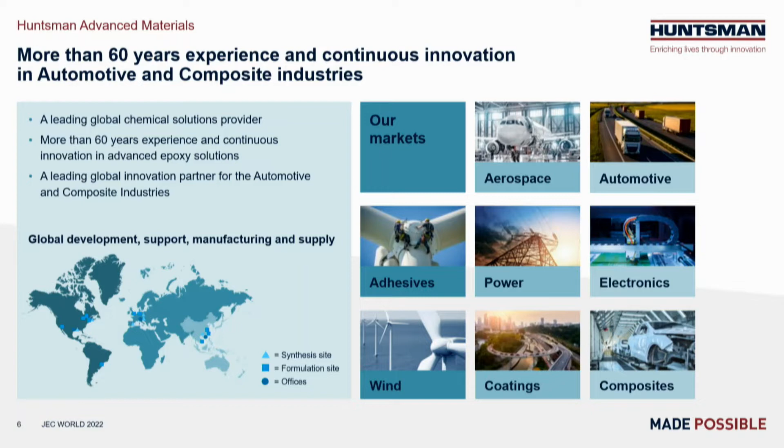We are specialized in epoxy resin formulations, and we serve different markets. We have a global footprint in terms of research centers, manufacturing sites, development offices, and so on. We serve several markets like aerospace, automotive, adhesives, power, wind energy, coating, and of course composites, industrial composites linked to transportation.

Building a sustainable future. I will try here, because we see so many greenwashing presentations these days, to focus on facts, and bring key actions, even short-term ones, even though we have longer-term responsibilities and longer-term actions.

We do take our responsibilities these days, because as a chemical player in the industry it's really important. It's not a nice to have, it's a must to act and to do something. And it's not just for the long term, it's acting today, for tomorrow, and even for longer term.

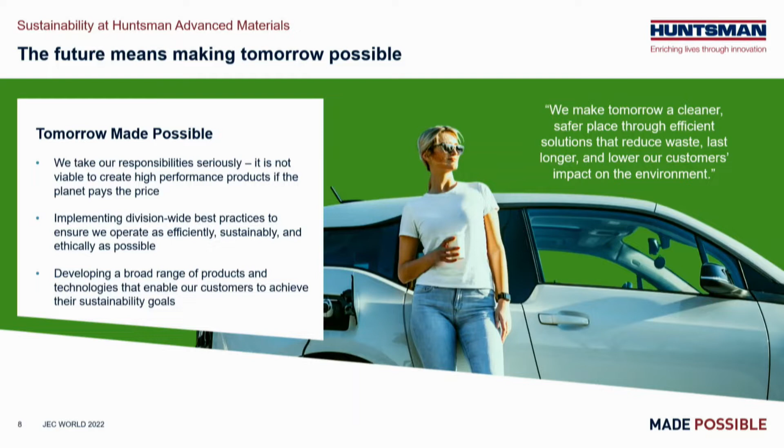So we discuss with our customers, we check the regulations, we check whatever is possible to do to put some concrete actions in place. We act basically on 4 different elements.

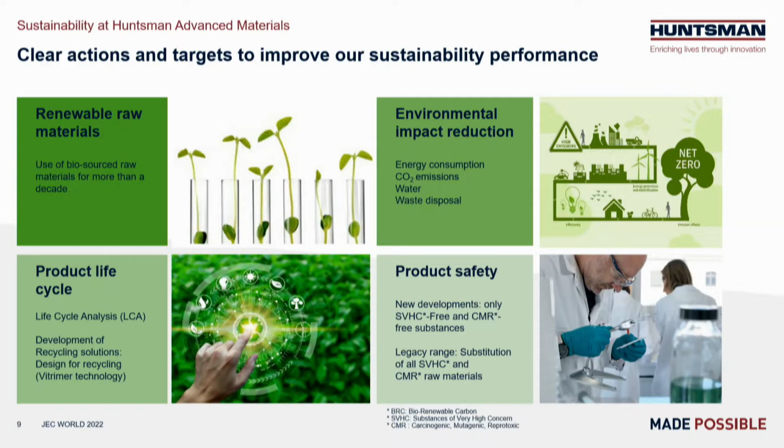The first element is the use of renewable raw material in our products, in our epoxy systems, in our epoxy resins. Actually, we've been using bio-renewable resources for more than 10 years now, so almost for a decade. We weren't really communicating on this before, but it was already part of our DNA and part of our products. And of course, to quantify and analyze this, we look at the product life cycle. The life cycle assessment helps us quantify how much and where we should take action.

We are also involved in the recycling topic, which is of course very important, especially when talking about thermosetting resins. We have actions in place, we are involved in developments, and we are involved in initiatives with universities and so on, and European-funded projects regarding, for example, the Vitrimer technology.

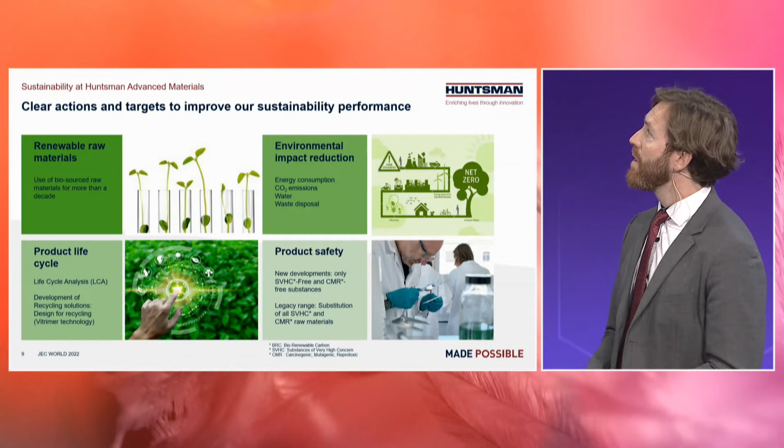Another aspect is the reduction of our environmental impact: the energy consumption, the CO2 emissions, the water consumption, and waste disposal.

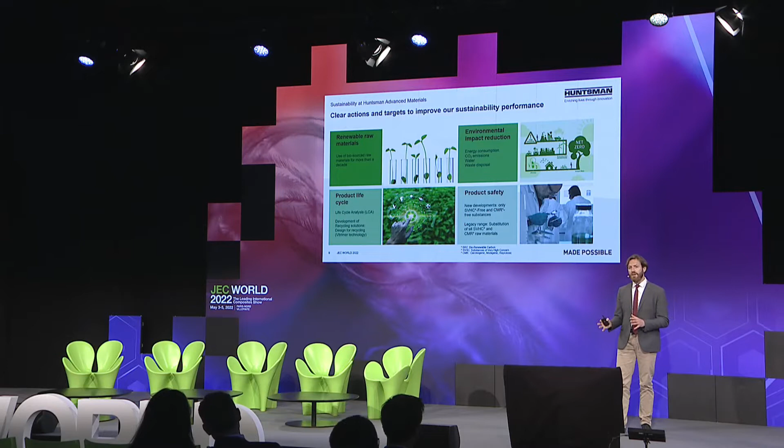And finally, product safety. We have a dedicated team of people taking care of new developments, but also the legacy range, checking in order to not use any substance of very high concern or carcinogenic, mutagenic, and reprotoxic substances.

So you can say, yeah, nice, you have a nice pitch here, but what are you actually doing? On the next slide, the idea is to bring you some numbers on two of those elements.

The use of biorenewable products or substances has been done for a decade, as I mentioned before. Today we have between 15% and 85% of what we call the biorenewable carbon content in our resins, epoxy resins, and reactive diluents. We have a roadmap, and next year we will have 100% certified biorenewable carbon in our resins. That's the first step, and the second step will be to tackle the point of our curing agents, so epoxy hardeners, with a roadmap before 2025.

Then in terms of reduction, we quantify it by analyzing the global warming potential of our epoxy resins. We started this exercise in 2020, where we started with, for example, 5.4 kilograms of CO2 emissions per kilogram of epoxy resin created.

And then in 2021, thanks to the management of the energy source we are using, we already achieved a reduction of 23%, and now we are on the way to decrease it by 70% between 2023 and 2024. So substantial improvements.

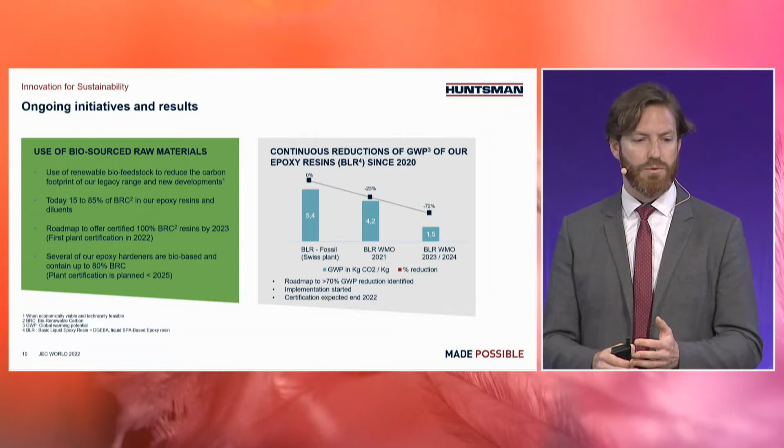These are more short-term elements, but I think it's important to highlight the actions we already have ongoing today. So with this introduced, let's go for the solutions and explain what we are doing for tomorrow's mobility.

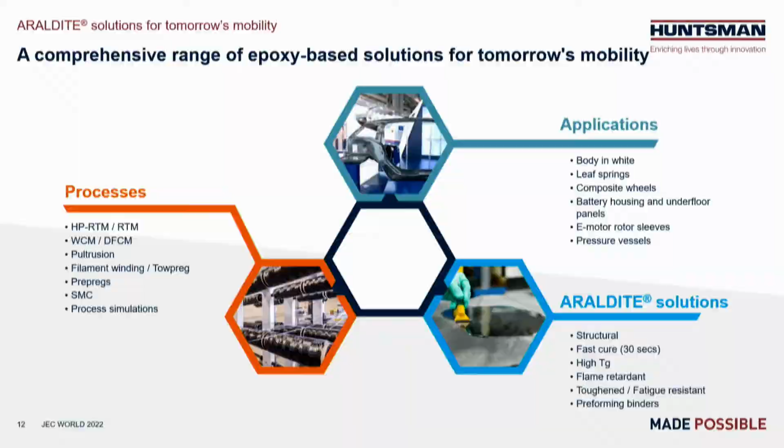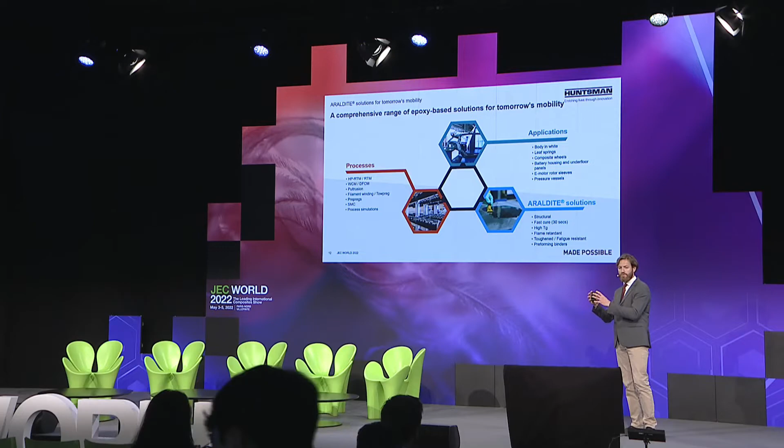On this slide, I propose an overview of the epoxy range, included in the big picture of applications, products, and processes. I believe everything is really interconnected. You take an application, then you have specific requirements, so you put a dedicated epoxy resin solution in front of it, and then you need to process it in the right way. Even when you start from the application, you design a process. So it's important to understand the big picture to bring our customers the right product and solutions.

In terms of applications, we target structural parts like body in white. It can be for automotive transportation, but nowadays flying vehicles are also using our mass production systems, actually in development right now. We can also replace leaf springs. We have composite wheels. The more emerging applications are related to battery housings, protection of battery cells, protection of passengers in vehicles, and underfloor panels. There's also an interesting application related to electric motors, covering rotor sleeves, so composite rotor sleeves. And finally, pressure vessels, and with the emergence of hydrogen and fuel cell vehicles, pressure vessels are something important we are focusing on today.

In front of this, we put the ARALDITE solutions, epoxy-based formulations, which are structural and can cure in seconds. We have one system curing in 30 seconds at 140 Celsius, without any post-cure afterward. We can also address high thermal resistance, with systems having TGs above 200 Celsius. We have flame retardant systems that can be injected in different processes without containing any fillers or solids inside. We have toughened resin systems designed for fatigue resistance, and preforming binders for mass production.

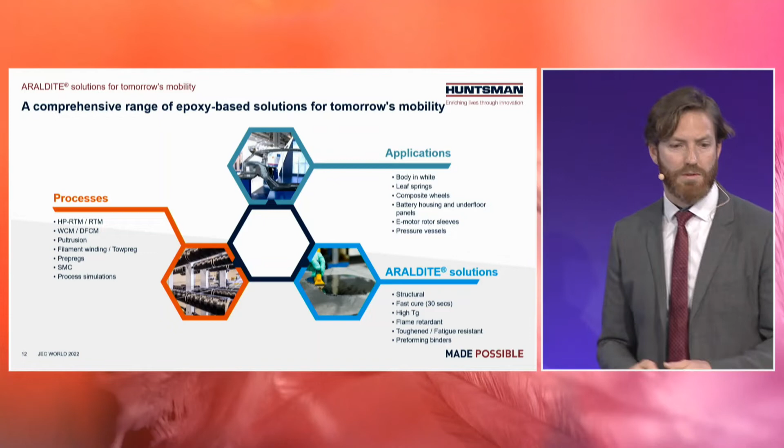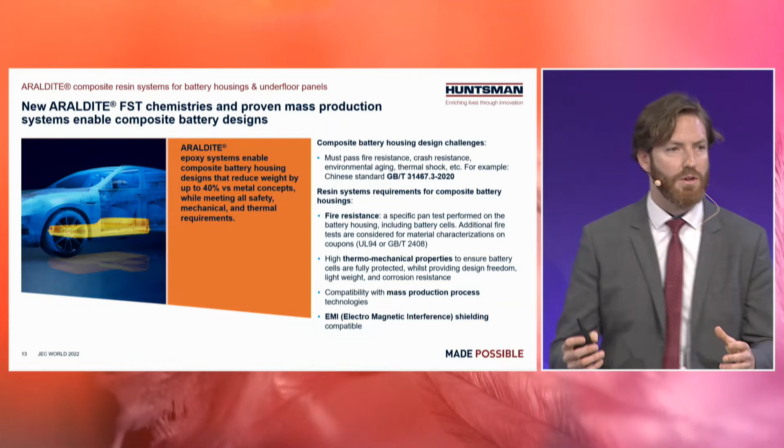The first type of application I'd like to talk about is battery housings and underfloor panels. The objective here is to protect battery cells and protect passengers in case of an unexpected event, like fire or thermal runaway. The objective of having a composite design is lightweight, weight reduction. When we design these products, we always start from the challenges of our customers - understanding what standards they need to pass, what tests they are doing - and then we put in front of this specific properties like fire resistance, thermomechanical properties, and compatibility with mass production, since we're talking about large series production, as well as compatibility with electromagnetic interferences.

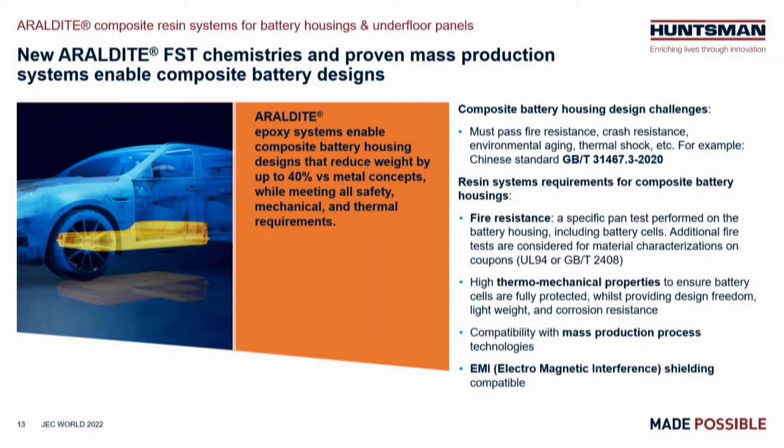So we developed three different concepts. Concept number 1 consists of using an intrinsically fire-resistant system. Basically, you use whatever fiber you want, then process those systems in different ways. They are already fire-resistant. For example, at lab scale, on coupon level composites, we pass the UL 94 rating V0. So it's the easiest way to bring fire resistance to the component.

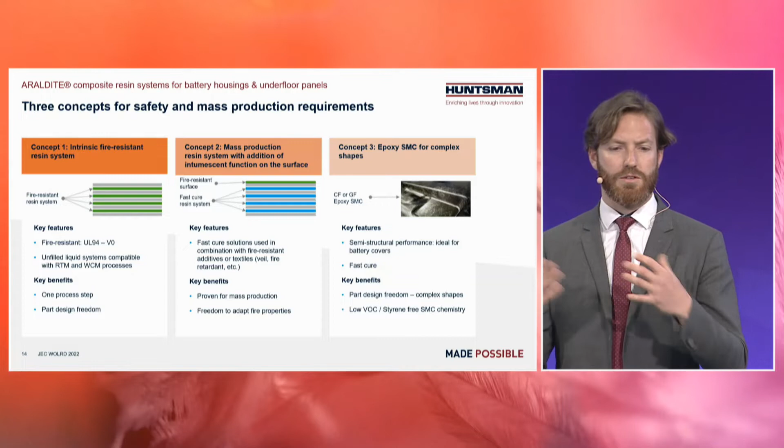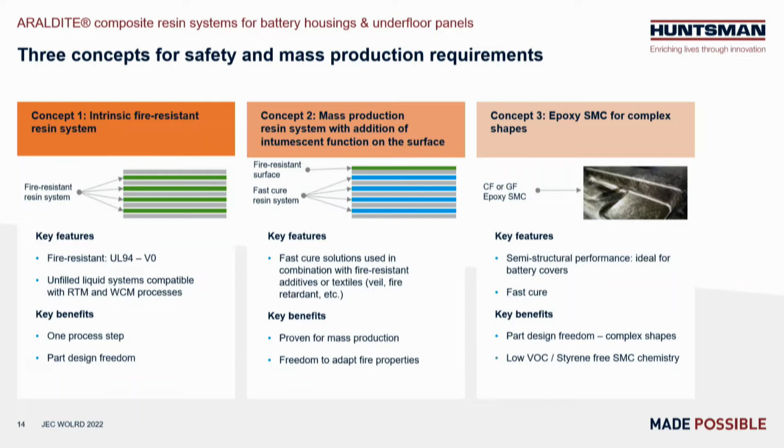Concept number 2 is to use mass production systems, more classical solutions already qualified and running in production, and we leave the decision to the customer to use a fire-resistant surface or fire-resistant additives combined with the resin to bring the specific properties. Then concept 3, for a little more freedom in design and shapes, well suited for battery covers, is the epoxy SMC. The benefit of epoxy SMC compared to classical SMCs is having very low VOCs and styrene-free chemistry.

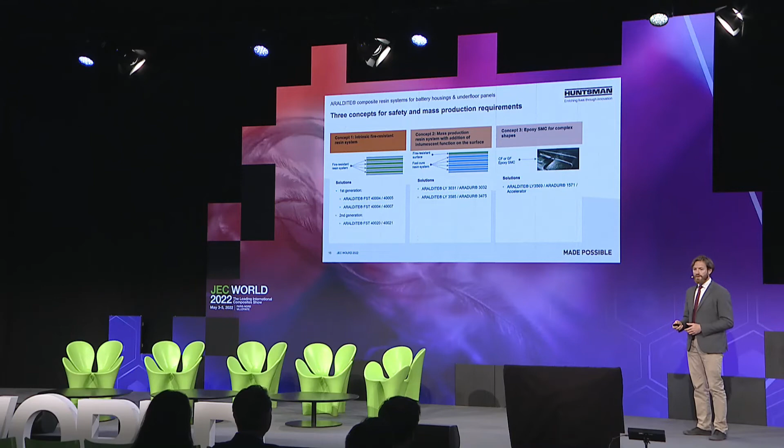So here are examples of a few resin systems. We have a full range, a portfolio, to be able to adjust and adapt to the requirements of our customers.

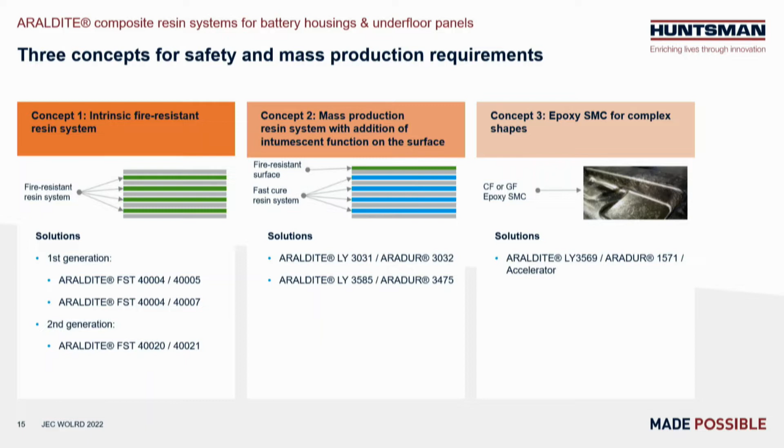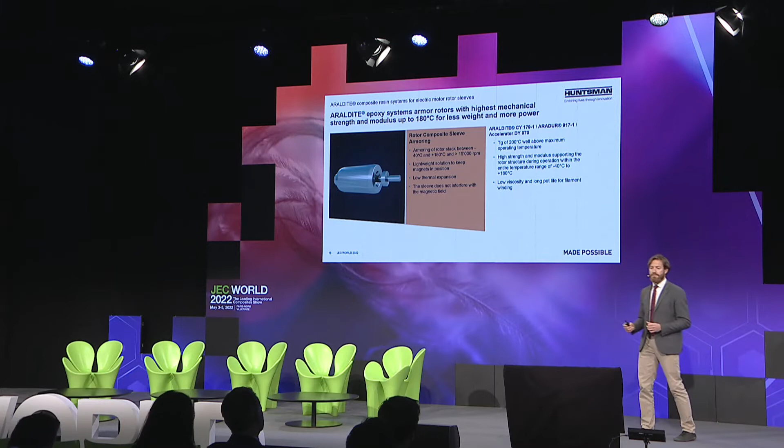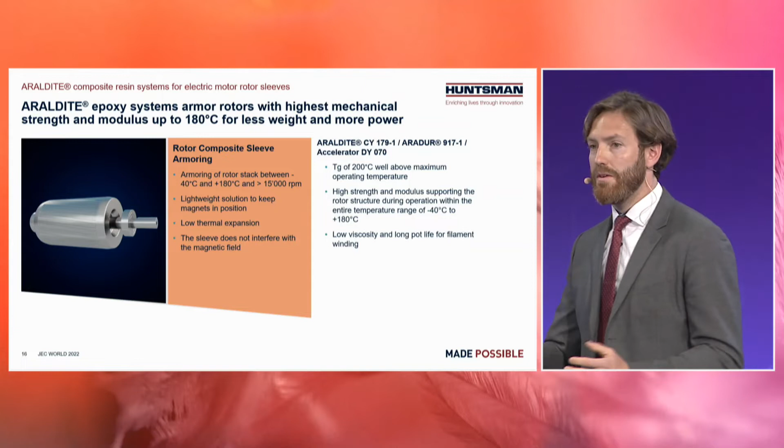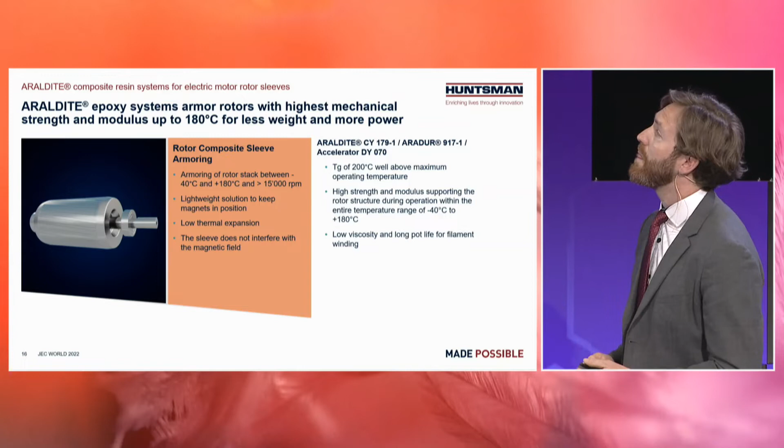So the second type of application is the rotor composite sleeves. The idea is to reinforce and maintain the structural integrity of the rotor during very high speed rotations, above 15,000 RPMs, in a range of temperature from -40 to 180 Celsius. So we have a system dedicated to wet filament winding with low viscosity and high thermal resistance up to 180 Celsius.

Then the pressure vessels. We have 2 elements here: on one side the safety, because we're talking about very high pressure storage systems, and the productivity, because the projections for the future are quite incredible. So increased productivity is also something we have to tackle.

Huntsman Advanced Materials has been involved in the development of pressure vessels for more than 15 years. We started with compressed natural gas. We have a full track record of products already qualified in those applications, in running automotive programs. And more recently, we qualified at least 3 different systems for 700 bar hydrogen storage systems.

Our strength here is really to have close collaboration with our customers. We understand their challenges. We try to always understand exactly what they need, and then we put the right solutions in front. So in terms of solutions, we again tackle different manufacturing processes.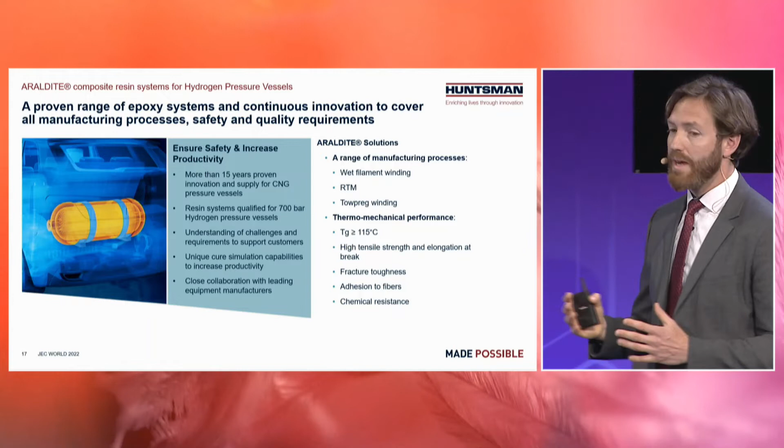The wet filament winding, the RTM, it can sound a little strange for this kind of shape, but for small vessel design it can make sense. And then finally the towpreg winding, which is a growing application now, especially in Europe. We see some interesting developments there - I'll develop a little bit more in the next slides.

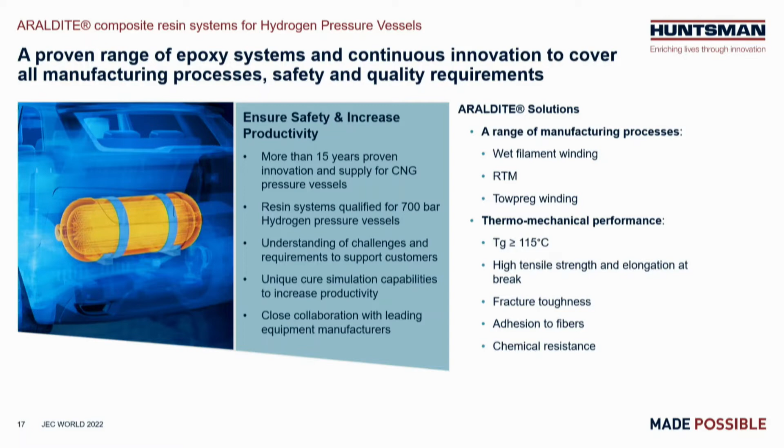So starting from those requirements, we developed resin systems with very specific thermomechanical properties to make sure that the safety is ensured, with specific strength, specific elongation at break, fracture toughness, and thermal resistance.

So let's start with the wet filament winding. It's a well-established technology used for decades and decades, so it's a proven technology. And we have a portfolio of products, a little bit diversified.

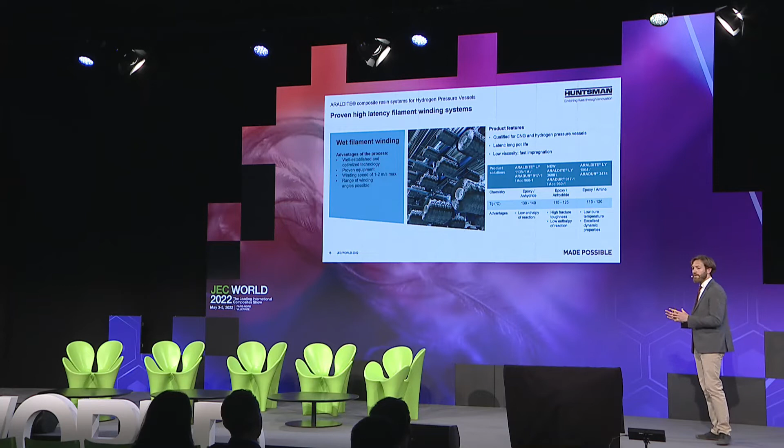And this is not the only platform we have. We can also play around with different platforms, but here are reported 3 different resin systems with long pot life, fast impregnation, and very good thermomechanical properties.

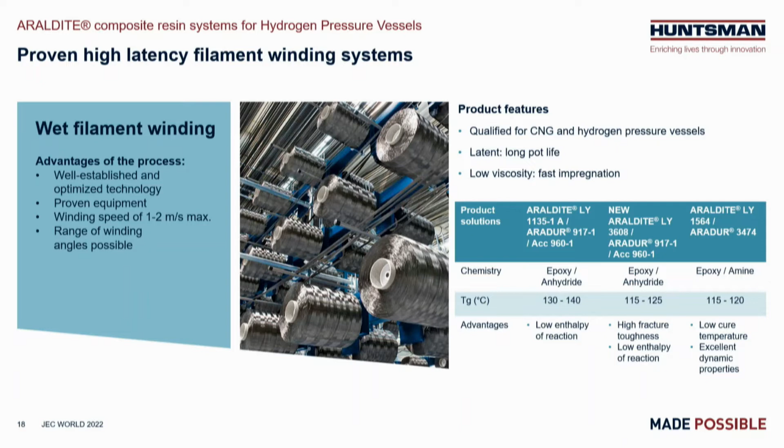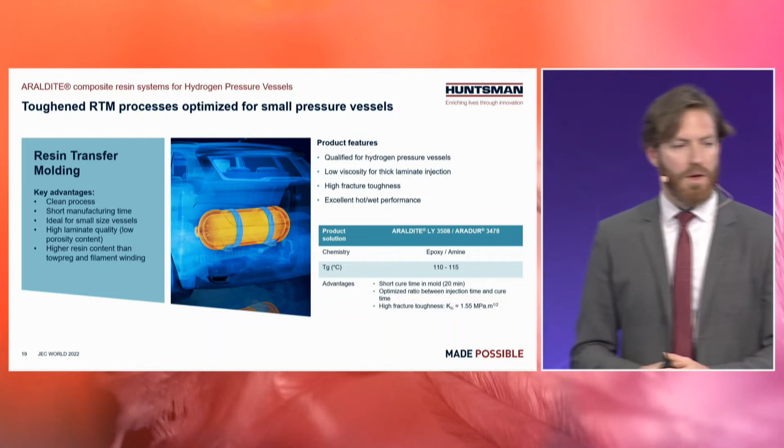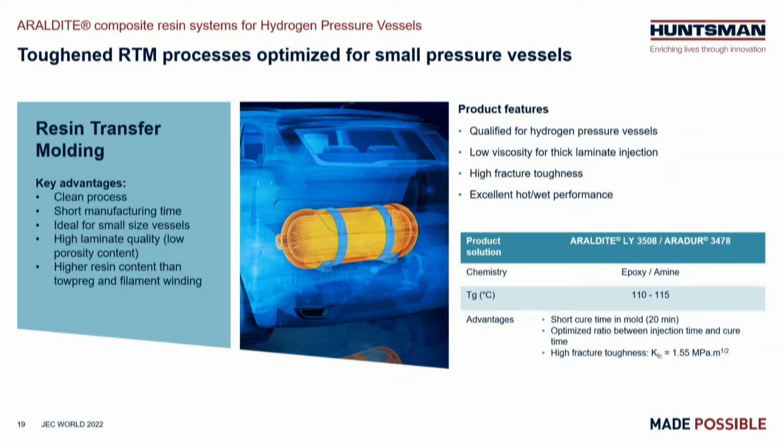The advantage is that it's a clean process. You can reduce the manufacturing times. The in-mold cure time can be quite low, so 20 to 30 minutes. And the epoxy resin we've developed specifically for this application has high fracture toughness for excellent dynamic properties, so cycling test compatibility and so on.

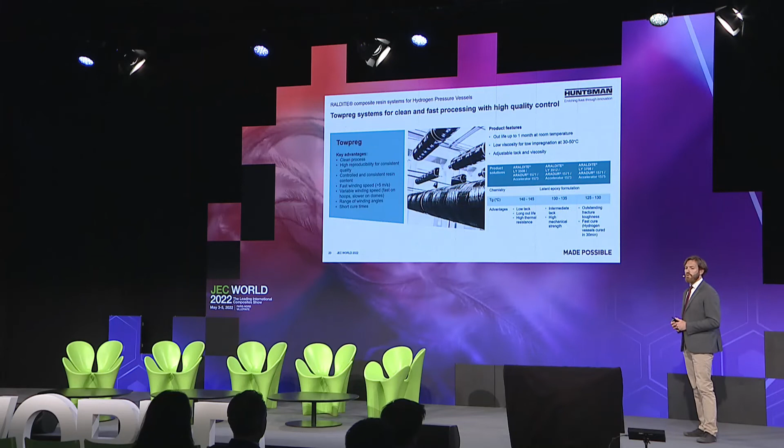Then the towpreg. So the towpreg is also a clean process. We've been working for years now on the development of a product range. We started our developments in Asia, more precisely in Japan, with some experienced partners.

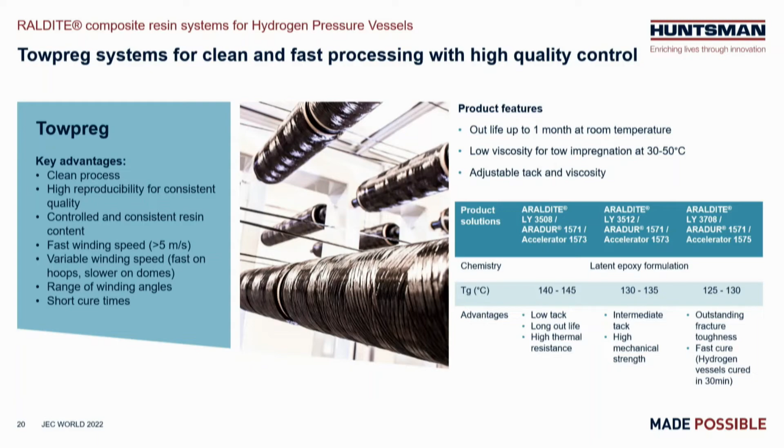And now we are bringing this technology worldwide, working with different partners, because our target is not to sell the towpreg directly to the industry. We are selling the formulated resin system that will be used by different players: towpreg manufacturers, end-use customers that would like to make it in situ, and even carbon fiber manufacturers. So our specialty is really to develop the resin system in collaboration with those partners.

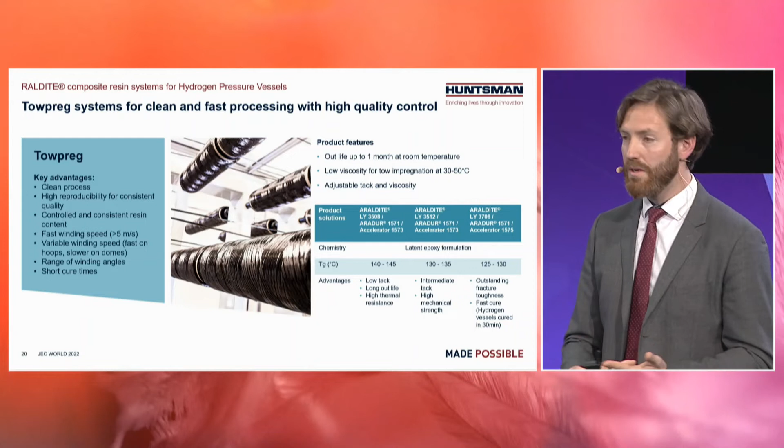So the advantage is a clean process, very consistent and controlled resin content, and very fast winding speed. On the machines we can now run with 5 meters per second.

So then a few words about the proven mass production process. This is not really new in our portfolio, but at least it's running in production. We have several resin systems for high pressure RTM and wet compression molding with very fast cure times, which are also highly structural.

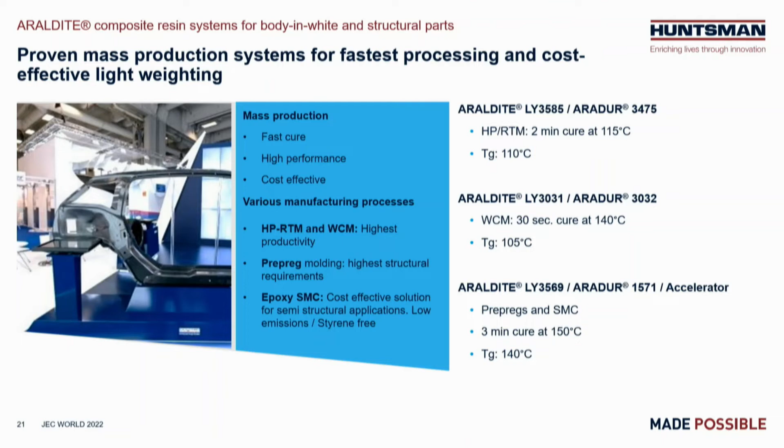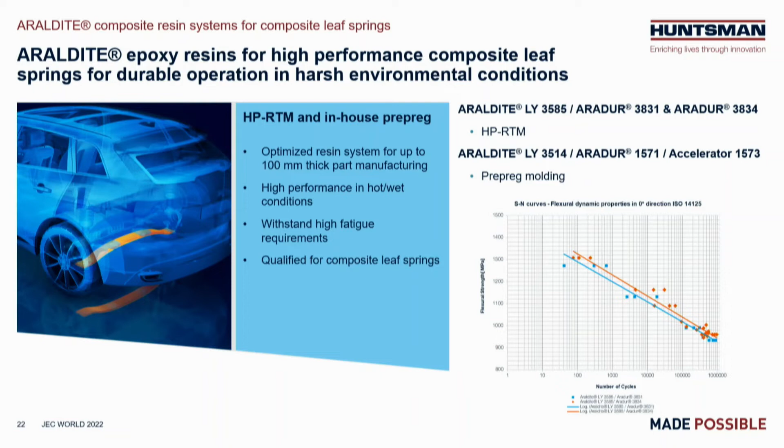And the same for leaf springs, where we've been focusing on fatigue resistance, generating a lot of data on the parts, at the coupon level. So for example, here are some SN curves that we've done on these 2 examples of resin system, also compatible with high pressure RTM or pre-preg, depending on the requirements of the customers.

Then a few words about customer support, because the intention of the customer support is to make the best use of our materials. You can have the best resin systems and the best mechanical properties you want, but if you do not use it in the right way, you cannot take the benefits of these advantages. So that's the purpose of the customer support.

So we support with simulations, mainly related to cure kinetic simulations. Then we have very nice testing capabilities in Basel, Switzerland. We have an ISO certified laboratory, which can also help our customers save time during their developments. And finally, we have a nice processing lab.

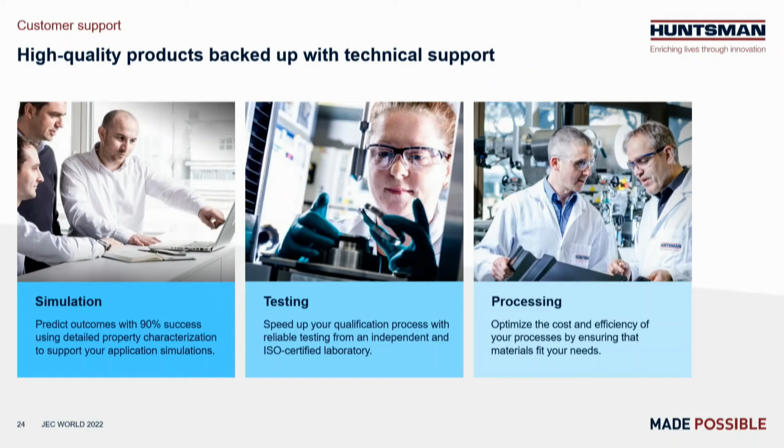So just a little bit about simulation capabilities. Here is an example with pressure vessels. So what does it do?

So most of the processes, you have input of products, you get to a process of temperature, for example, but you don't really visualize what's going on live. So you make trials and errors to try to identify what kind of curing time and temperature you should work with. The advantage of simulation is to visualize what's going on. The first element is we can ensure safety.

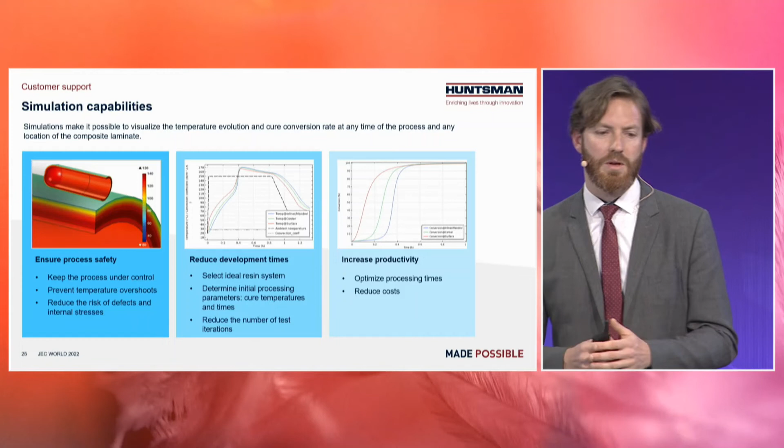For example, it's the case for pressure vessels, type 4 pressure vessels, 700 bars, sometimes you go up to 40 millimeter thickness. If you put a pressure vessel directly at elevated temperature, you will have a temperature overshoot, which can cause degradation of the resin system, leading to porosities and every kind of defect you don't want to have. So having simulations helps prevent those risks, including degradation of the liner material. We can really prevent those risks and keep the process under control.

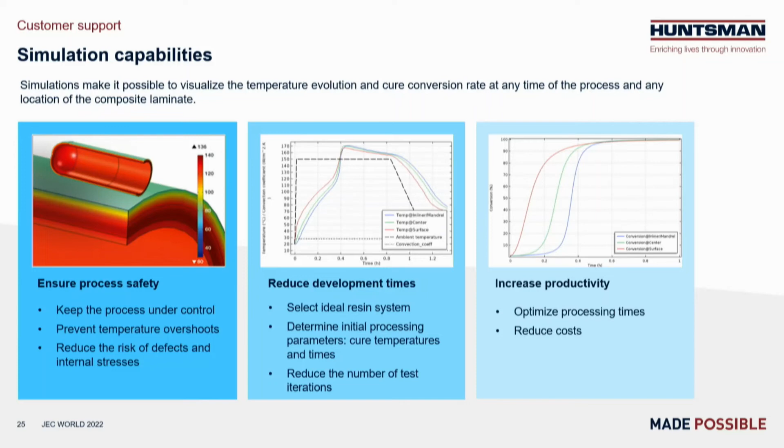Then we can reduce the development times, because we can limit the number of iterations. We select the resin system first and give some initial recommendation parameters. Then in terms of productivity at the end, we can optimize exactly the processing time—not too long, not too short. You have exactly the right curing time.

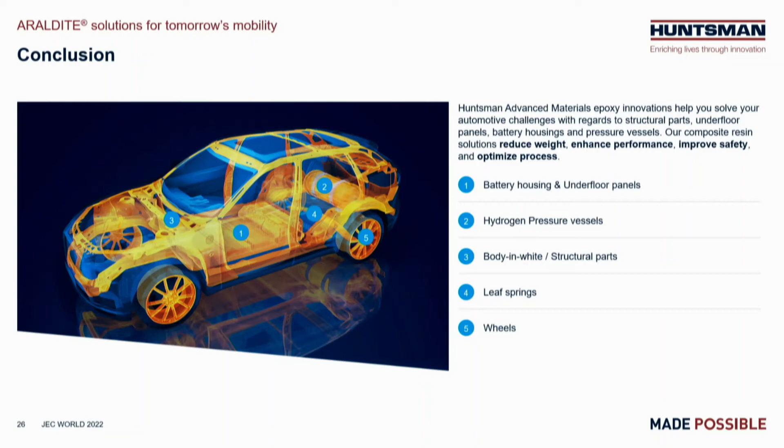So all in all, we are active in this new mobility, tackling different vehicle applications: battery housing, underfloor panels, hydrogen pressure tanks, body-in-white, and other structural parts like leaf springs and carbon wheels. So we have a full portfolio and dedicated teams with highly technical skills to serve you and this type of market.

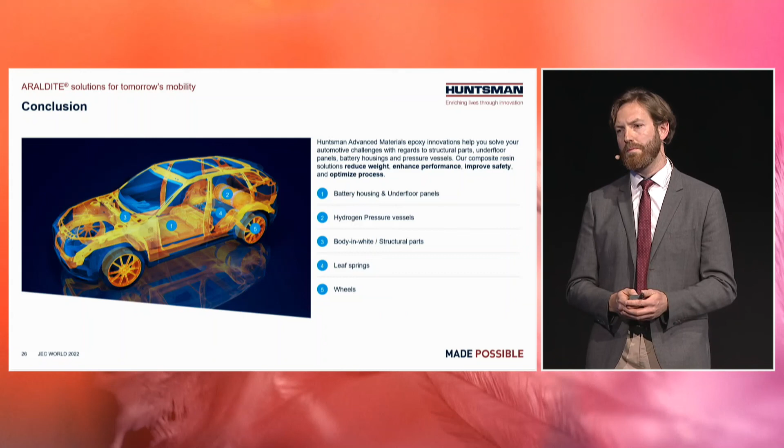How about the combination of lower temperature and shorter time—can they go hand in hand? Yeah, so the next question was about low temperature and short cure times.

Yeah, it's always a compromise to be found, actually, because in a process you need to check the time, but you also need to have the impregnation time—enough time to impregnate your fibers—and then be able to cure, demold, and have the part. So technically speaking, we could be even faster, but the problem is if you are faster, you don't have enough time to impregnate properly your fibers. So this is the balance that needs to be found.